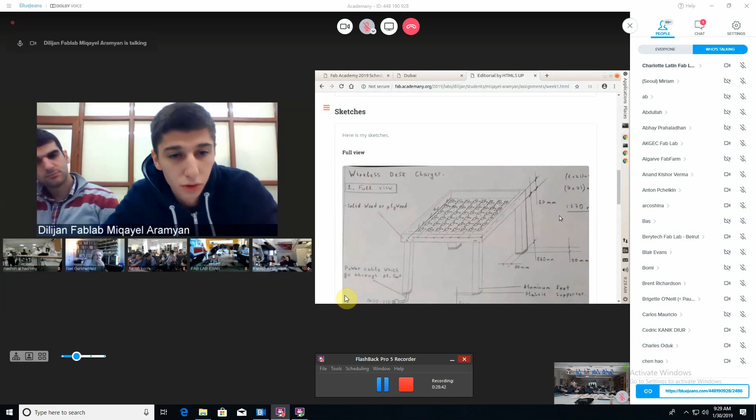Make a desk which is fully wireless charger. Wherever you put your device on the surface of the desk, it will charge, and it can charge several devices at the same time. Also, I'm thinking to make a receiver for computers, to put this receiver under the computer notebooks, and it can charge it wirelessly.

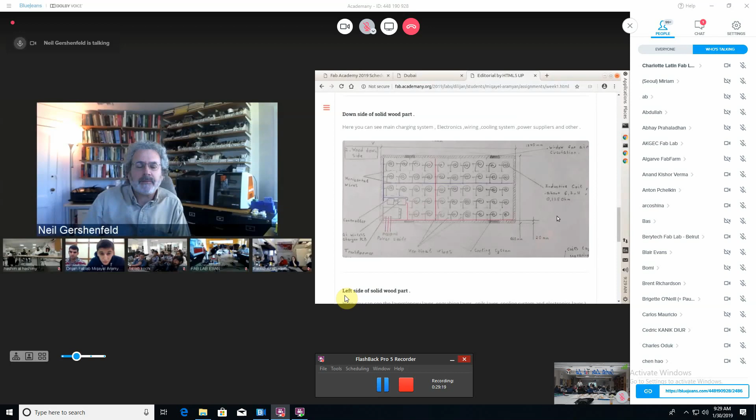The direction is good. For computers, you need to be careful about the amount of power you can transfer. One of my former students is one of the gurus of wireless power - look at Josh Smith. He's done lots of versions of sending power wirelessly.

Let's see. So he has lots of versions of, like, lighting up a light bulb at a distance, and a number of research papers on how to do it. He's transferring lots of power, watts of power.

It's a fairly ambitious thing, and one direction would be to make something along these lines that can do large amounts of power. Now, your project raises a question I can't answer, which is I don't know what the standard is for like a cell phone for wireless power. I've never looked at that. I don't know if anybody listening has - I don't know if it's just a frequency or if there's some encoding or modulation.

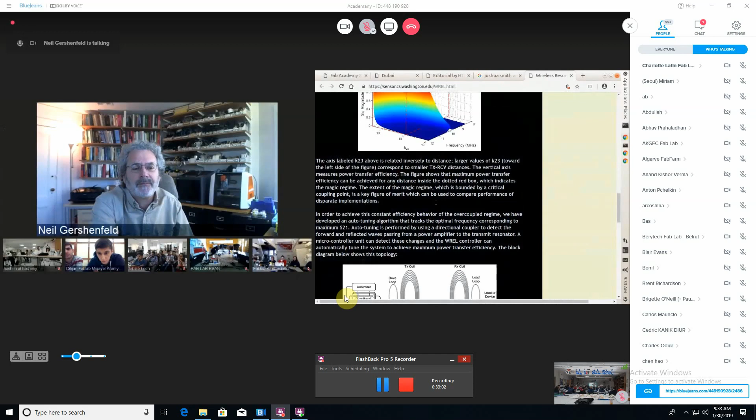It's an interesting question because I've never looked at the standard for phone wireless charging, and it would be interesting to reproduce that. Just for the physics of it, Josh has written a lot of papers about how this works that can cover background for what's going on.

Okay, I will look at it. Okay, thank you. Good, okay.

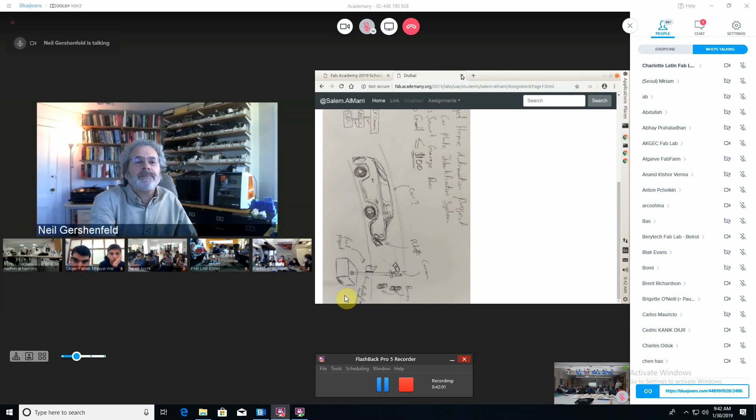Where is La Lab, Elvira? Oh, Suriname. Are you on, Suriname? Yes, we're on. Okay, good. So just to remind everybody else, Suriname is there.

So, my name is Elvira Rajesh, and yes, I'm a student of business economics, and yes...

I'm participating in Fab Academy 2019. I'm a distance education officer in my department—we have students that work far away from where they need to study. So my department, we implemented distance education so students can follow their studies online.

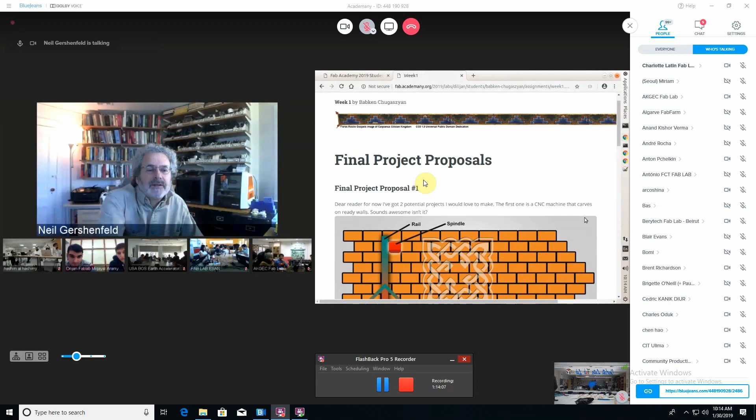Okay, nice. So did you have a final project question? Yeah, my final project is about carving, about building a mobile CNC machine that would carve on ready walls. We have a lot of ready walls, from tuff, a relatively soft rock, and not just ready panels, but walls that are made from bricks.

And I have a second proposal for a final project, about smart classrooms, building a chair that takes attendance notes from each student.

You could do either, which are you more excited about? I'm excited about both, but we talked with Ohad and he thinks the first one is better because it somehow reflects our cultural heritage in Armenia. Stone carving is a very old tradition in Armenia, and we have so-called khachkars, carved rocks, and we have a lot of them all over Armenia.

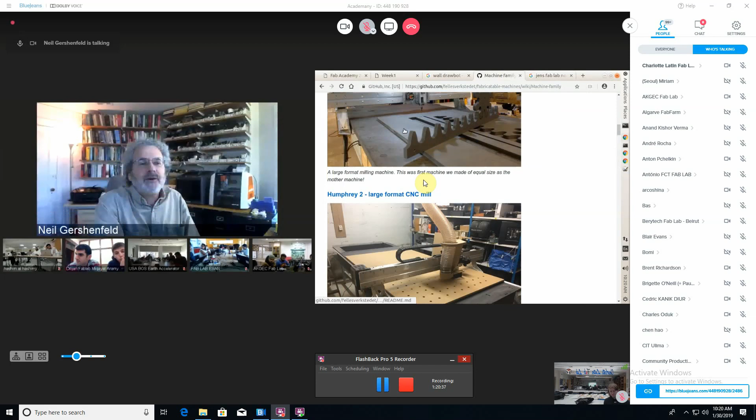And he's making, this is a fun sequence, a shopbot made that machine, which made this machine, which made this machine. And for the motion systems, he makes his own rack and pinions.

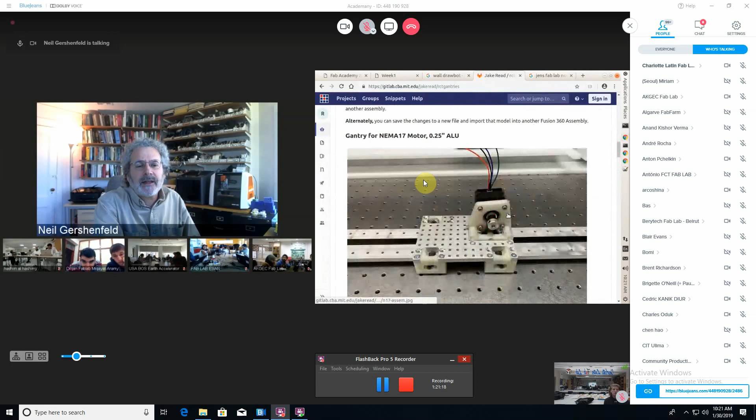I have a student, Jake Read, who has a site, Open Assemblies, where it's a slightly different approach. What Jake does is he uses the bearings from roller skates, and then he uses these bands rather than the rack and pinion. But this is another version of making your own axes for the motion system.

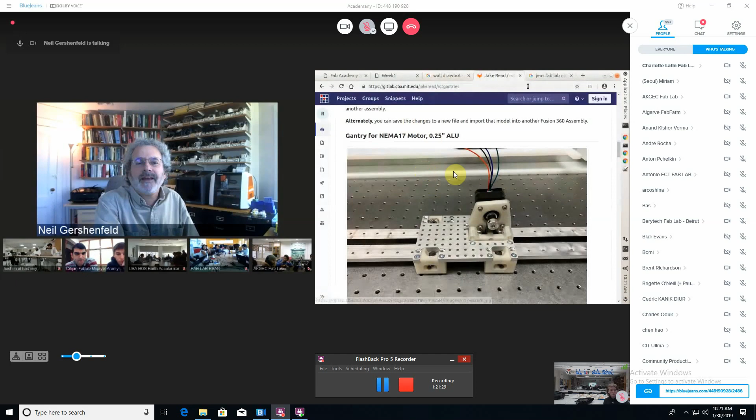I love this. Yeah, thank you very much. And so we'll cover lots of ways to do those when we get up to machine building.

Okay, so I have a question regarding my final project. I got an idea from a previous Fab Academy candidate. It was about a crystal structure digital cube. It's mentioned in my assignment week 1.

In the assignment section. Yeah, I understand, I'm going back to it. Let's see, yes, something's wrong with the website. I can't, when I go to assignment I get contact me, I can't click on assignments. Okay, let me tell you. I want to... okay, oh no, there I got it. Okay, yeah, go ahead, okay.

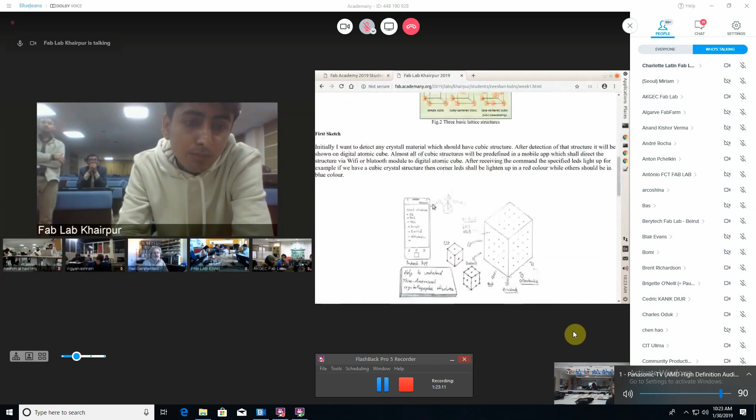I want to make a digital cube which shall print all the cubic crystal structures, the cubic structures found in nanotechnology. I'm really interested in this project, and I want to add some extra features, like image processing to detect some materials and print the structure of that material. And second, I want to detect the voice of any person or image of any person.

Sorry, let me interrupt for a moment. Let me explain to everybody: this open time at the end of the class isn't just for final project reviews. There are hundreds of students, and we'll work through the random generator. The real goal of this open time is not for final project questions, but to go over the work of that week, who had successes, who had failures, lessons from the week. So let me respond to you on this one, but the goal isn't for lots of final project questions, it's to talk through that week's work.

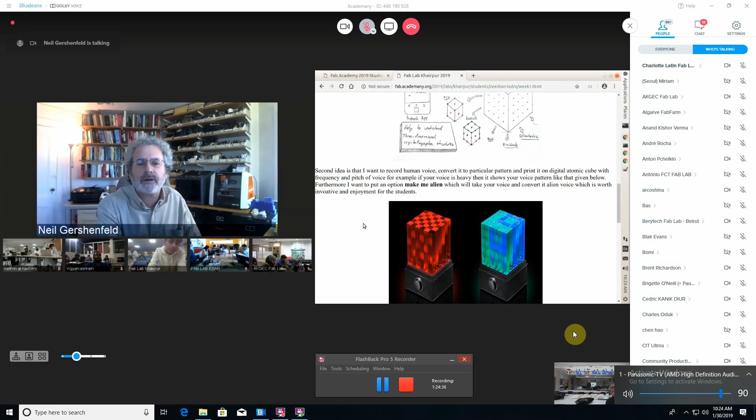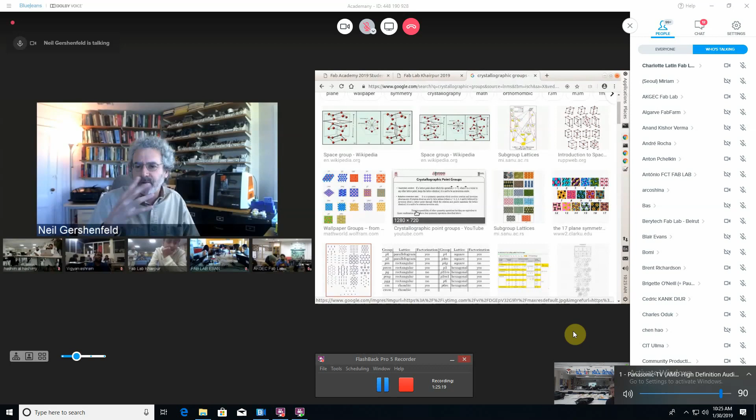This is a good direction. I think something that would be really interesting is crystallographic groups. The heart of crystallography is something that's really important but hard to learn. There's a crystallographic notation, and there's a fixed set of all possible crystallographic groups of local organization of a material. Something that could let you visualize the crystallographic groups physically and tell you what they are, and then tell you what materials have that group, would be really interesting. So a 3D version of the crystallographic group display would be a really nice project, turning this into a 3D display. A number of people have made lattices of LEDs, and that'll be straightforward, but connecting it to these crystallographic groups would be really interesting.

Okay, we're almost out of time. Let me go to, I know Vigyan Ashram wanted to say something, but once again this time isn't just for final project questions, it's to talk about lessons from the week. So Vigyan Ashram, go ahead. Yes, hello, this is Manoj. Okay, can you hear me? Yep, go ahead.

Okay, so I have a bachelor's in mechanical engineering and master's in entrepreneurship. Before Fab Academy, I was working as a business developer. My goal is to find some innovative product and start my own venture. Okay, but again, let's not do the whole random review, we only have a few minutes left. What's your question or comment?

Yeah, I wanted to show my website. It's made from the React framework.

Okay, let me explain to everybody: Vigyan Ashram we call Fab Lab 0. Fab Lab 1 was in Boston, but I visited Vigyan Ashram many years ago before Fab Labs even started, and the idea really grew out of working with Vigyan Ashram.

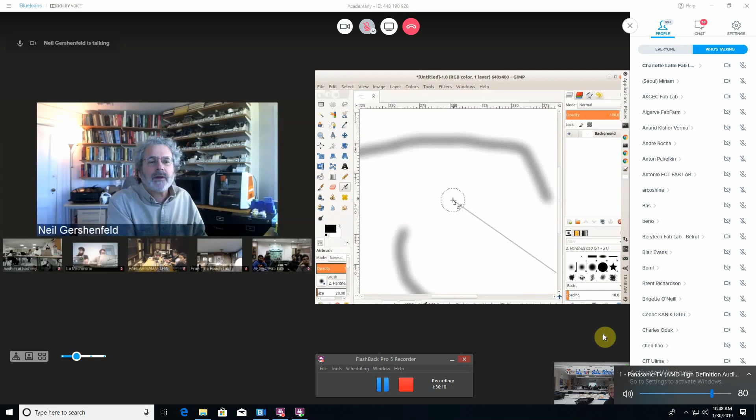GIMP is freely available, cross-platform, a very powerful pixel editing program. So when you work in GIMP, if you draw something, if you zoom in enough, what you'll see is you're representing things as individual dots, as individual pixels.

GIMP lets you paint, it lets you edit images, and it is a design tool because we're going to cover how to go from an image to all the fabrication tools. So once you have an image, you could laser cut the boundary, you could cut the intensity of the laser, you could machine the image. This is good for things where you need flowing expressive designs and single pixel images.

GIMP is powerful, freely available, cross-platform. I use it all the time. The commercial most popular tool is Adobe Photoshop, which is less extensible in some ways than GIMP. In many ways it's more powerful than GIMP, but it's a paid tool you buy or subscribe to. It's popular with people who do this for a living. I do a great deal in GIMP.

A neat tool to know is MyPaint. In class, when I've been making these sketches, I'm using MyPaint. What that lets you do is first pick the material you're on - is it fabric, is it paper - and then pick the kind of brush you're using. It has many types of brushes, and so it emulates drawing on a material. It's a really nice drawing painting tool, and that's what I use for the illustrations in class.

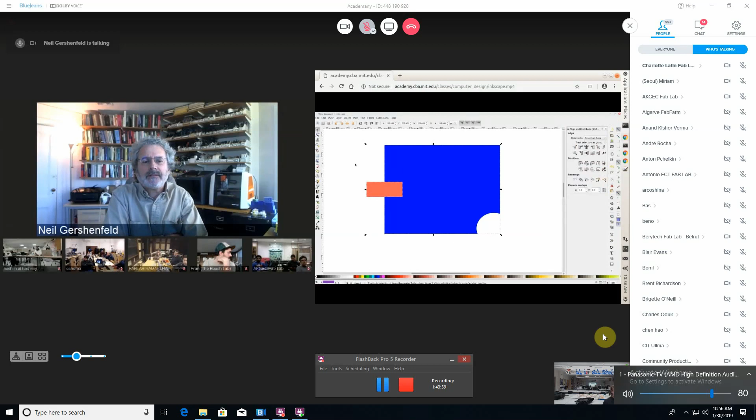Now instead of copying this object, I'm going to clone it. A clone creates a linked copy, so with the clone I can align that. And now if I take that object and change the original one, the clone changes.

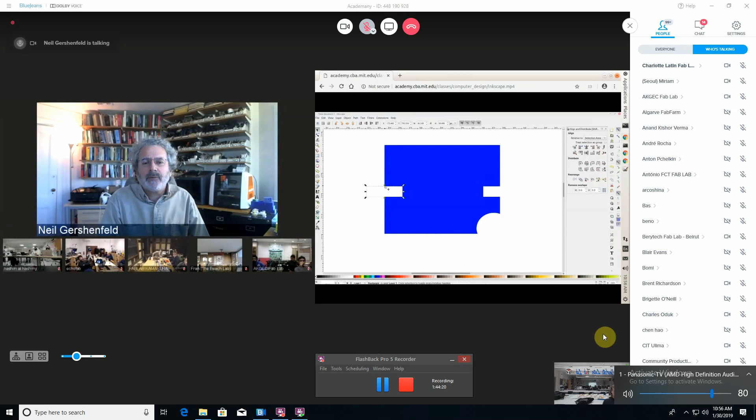That was a really simple way of doing it - I'm going to show you much better ways. Let's see, somebody is asking on the chat to do something on my PC screen. I'm not sure what you're asking for.

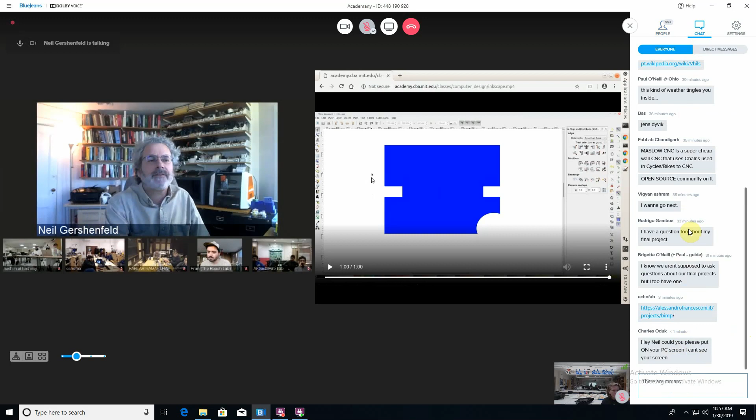That's a simple way to make a cutout, and when you change one cutout, the others change. It's not really full-blown CAD, just a simple example. Inkscape is a freely available, nice tool for vector drawing, where you don't want pixels but you want shapes like circles, squares, and curves.

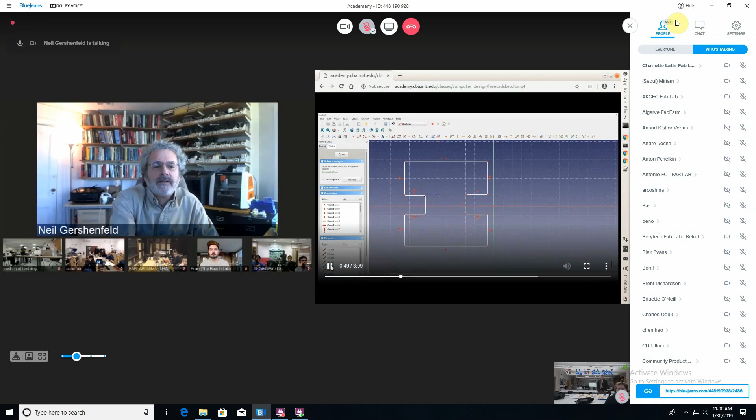So what I'm doing right now is picking 3 segments, and then I'm going to pick a constraint, and say those should be the same length. Now if I move a point, you see all 3 move at the same time because they're constrained.

Now I'll pick those 2, and make them the same length. So now those move together. And then I'll make those the same length too. So now if I move the point, it stays centered and they all move together.

Then I can dimension - I'm going to assign a dimension to that. And then I'll assign a dimension to that.

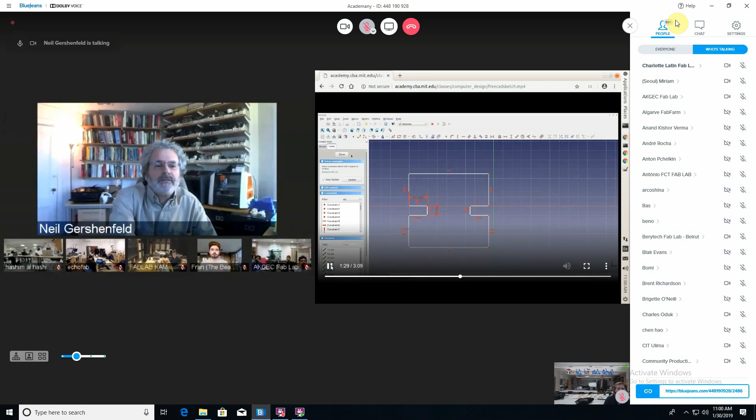So now if I go in and edit - well, before I do that, now I have my sketch. Now I'm going to promote the sketch from 2D into 3D. I'll go into the Part workbench and extrude my 2D sketch into 3D, turning it into an object. So there's my object.

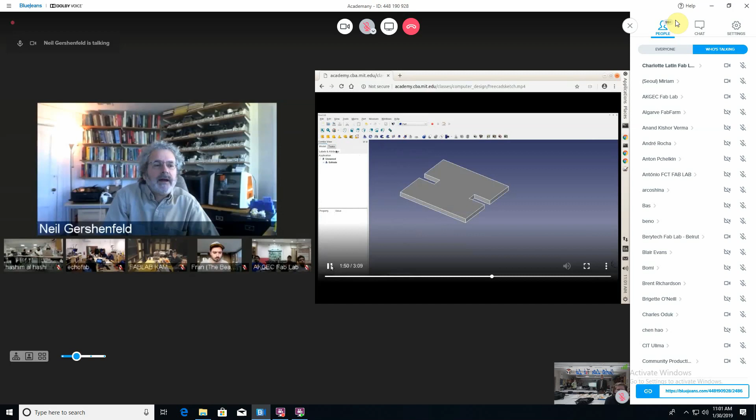Now I'll show you a more advanced thing you can do with sketching. Here's a 3D object I'm starting with. What I can do is take a part of that object and put a sketch right on that object.

So I'm going to put a circle here, and then pull in part of the edge - I'm going to say I want to use that edge in my sketch. And then I'm going to say I want to control the distance from the edge.

And here I'll just do a little more work - I'll make an object, I'll trim it, and then I can take the sketch I did in 2D on a 3D object and turn that back into 3D.

And then I'm going to cut this out of the object - I'll take those two objects, do a 3D Boolean, and take that out of it. So I drew in 2D on the object, and I drilled into it.

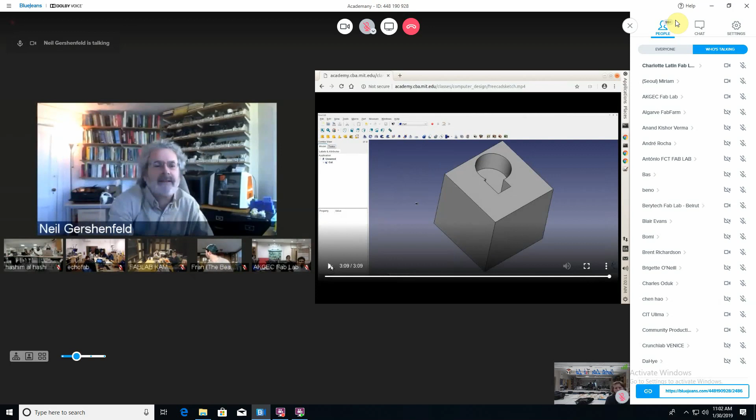This core capability of constraint solving is much more powerful for 2D drawing. You can have a single parameter for the slot size and use that everywhere in your drawing. FreeCAD is a nice, freely available cross-platform tool with a very powerful 2D constraint solver.

So that's 2D. 3D is a much bigger universe. This is a link to a thesis from a former student, now at Formlabs, on CAD geometry, and his thesis has good background on how to represent geometry. There's a number of terms to learn to draw in 3D.

Constructive solid geometry, or CSG, is the ability to do logic on shapes - you can add two shapes, subtract a shape, or intersect a shape. Constraint drawing is what I showed, where you don't just make a drawing, but express relationships in the drawing, things like tangency or distance.

Hierarchical drawing is - if you go back to the cutout slot example, you might design a slot, and we're going to cover joints that are actually very complex, then you reuse the joint many times over. So a hierarchical design is one where you design a thing, then use that thing in the design, then use those in other designs. And if you change something, it changes many different instances of it.

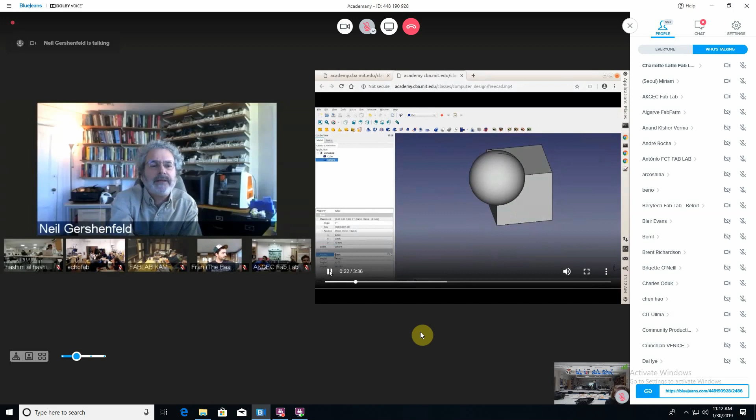So now what I'm going to do is position it and do a 3D Boolean, so I just subtracted the sphere from the cube.

But now, crucially, unlike a simpler tool, the cube and sphere are still there. If you look, they're grayed out because I've done the Boolean, but they still exist as objects. So now I'm taking the sphere that looks like it's gone, but it's still there, and I'm going to edit it. When I edit the sphere, I'll change the cutout.

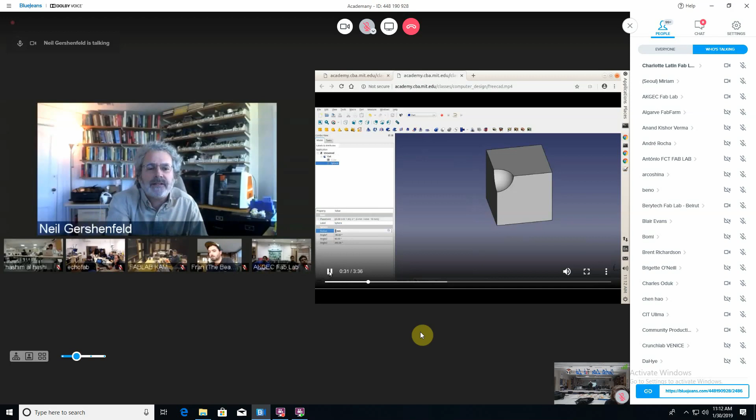So now I'm going to start doing a more complex operation. Just like the clone in Inkscape, I'm going to take the sphere and make a clone of it, which is a linked copy. I'm going to position that, and then I'm going to do a Boolean again.

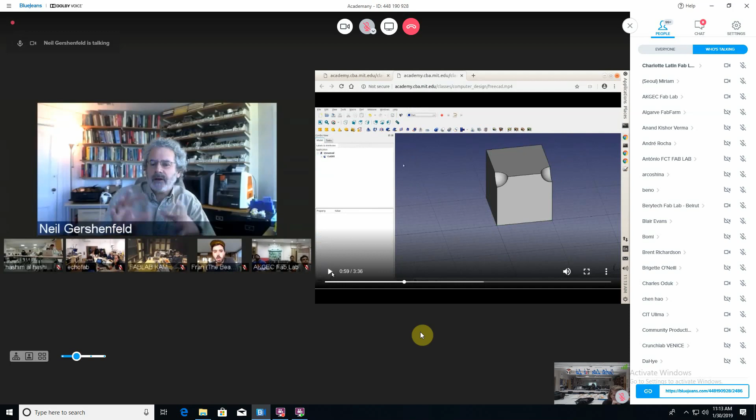So now I have two cutouts: my original sphere and then the clone. And then, as you would expect, I can go to the original sphere and change it, and both cutouts will change because it propagates through the clone.

Now, this is the heart of parametric design. You might have parameters like the thickness of your cardboard or the type of material you're using. So I'm going to add a spreadsheet, and in the spreadsheet I'll say radius, and I'm going to add a field.

And so I've got a number there, which can be a formula. Then I'm going to give that field a name, R. So now I'm going to go back to my drawing, take the size of that sphere, and link it to the spreadsheet.

So what I just did is say the radius of the sphere comes from one of the variables in the spreadsheet. Now if I go to the spreadsheet and change the formula, then go back and look at the sphere, the spreadsheet controls the dimensions of the thing in my design. That's a very simple formula, but next week I'll show you a more complex use of a spreadsheet with a formula.

Now, a few other things. Here I'm going to control how it's rendered. So I just made it 50% transparent so you can see into the object, which is really handy when you're designing.

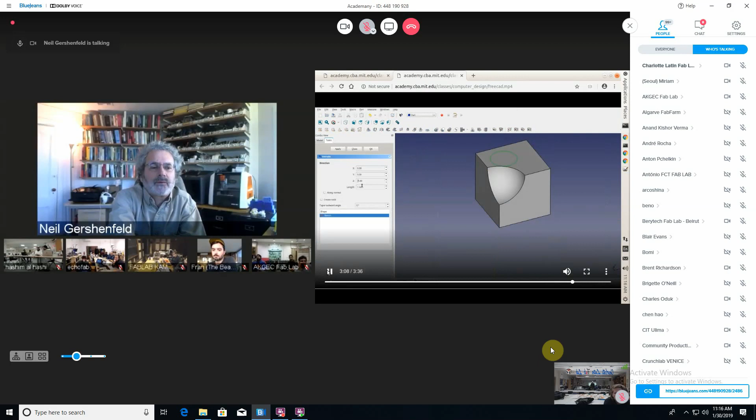So I want those to touch. I did 3D design to make a cutout, now I'm making a 2D drawing, but connecting the 2D drawing to the 3D cutout. Now I'm going to extrude that sketch and cut it out, make it a solid, and then do a Boolean on that.

So now I'm going to do something non-trivial. I'm going to go to the original sphere and change its size, and watch what happens. So the sphere got bigger, so that circle got smaller.

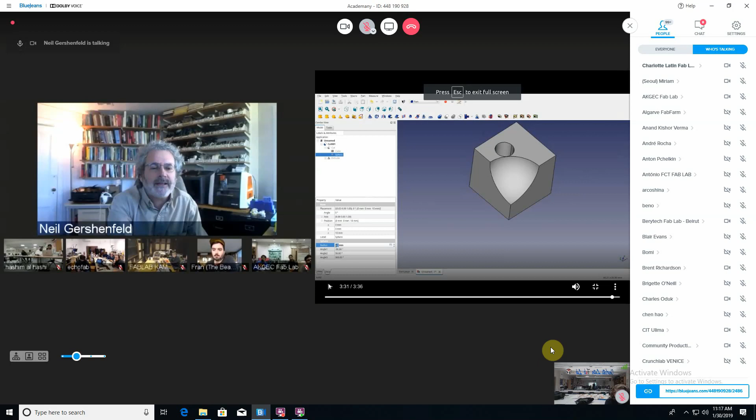And so when I did that, the sphere data had to go back through the Boolean. Then the Boolean had to go to the constraint solver for the tangency of the circle. And then that circle had to go back through a Boolean to subtract it again, and all of that is linked. So just in that last little bit, a whole bunch of different steps have to happen in the parts of your design. That's what a more powerful CAD tool does.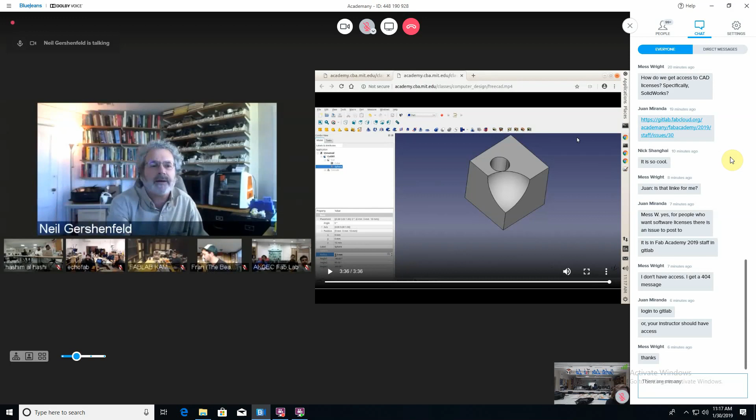In the coming weeks, I'll show you a number of different examples of more complex spreadsheets and parametric designs and their use. So once again, FreeCAD has evolved quite a bit.

Let's see, I don't have it on. Since this is Linux, I can just ask for FreeCAD, so I'll get that installing. It's well supported on every platform, and it's a really good design tool that just keeps getting better and better.

I'll show you when it's done opening. So then from Autodesk, there was AutoCAD, which I don't recommend for anything new—it's largely historical. There was Inventor, and the focus at Autodesk is Fusion. Until recently, a former student from my program at MIT ran that, Eric Wilhelm.

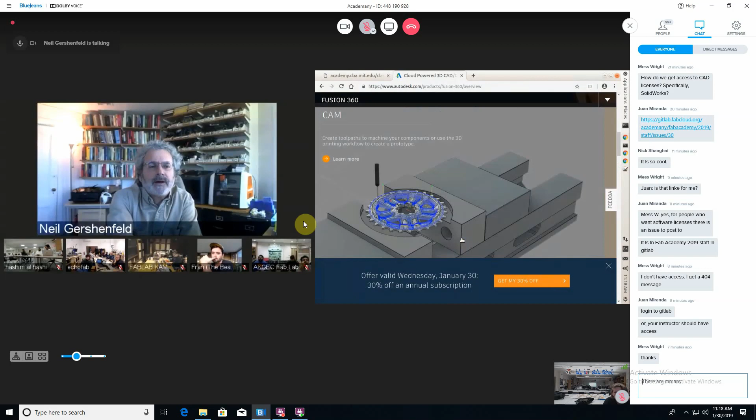Fusion is beautifully integrated—its real strength is that CAD, CAM, and modeling are all nicely integrated in the tool. It's not free or freely available, but Autodesk has a very aggressive education program, so it's freely available for educational, non-commercial use. They've been very generous in making it available. You do need an identity in their cloud to use it, and you need a connection to their cloud, so you can't use it on a deserted island. But it's very popular because it's so beautifully integrated—CAD, CAM, all the steps, modeling are all nicely integrated in it.

So here, thanks to the wonder of apt-get, I just installed FreeCAD. I was just going to show you, so let's see... okay, here it goes. There we go.

It's based around workbenches, so there are all these different workbenches and they keep adding ones. This is one for structural modeling, for example. This is one for dealing with point clouds. This is one for dealing with rendering. And everything is extensible in the Python language, so you can write programs for it easily, and then people contribute add-ons to it.

There's an add-on manager. Let's see, I thought it was in tools... I forget where the add-on manager is, but there are add-ons you can add that extend it, and there's a number of community add-ons that have been added to extend it.

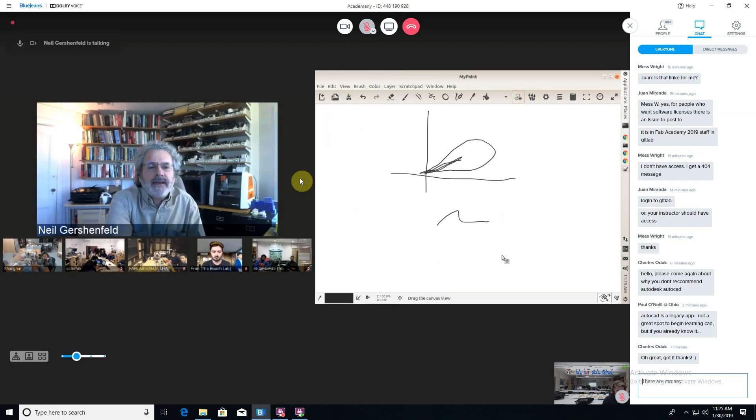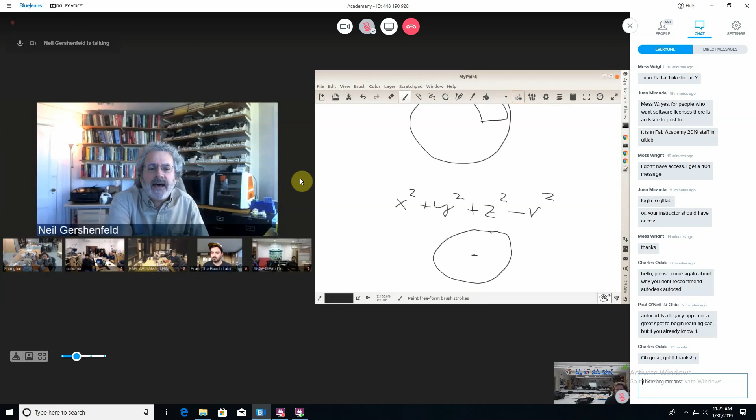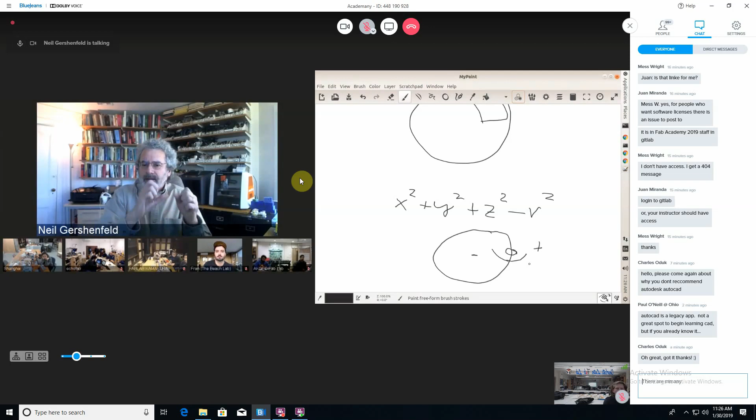If you have a sphere, these other tools model it as patches of the surface. In a functional tool, you have a formula: x squared plus y squared plus z squared minus r squared. That formula is a function—it's negative inside the sphere, positive outside the sphere, it vanishes on the boundary, and the magnitude grows around the boundary. So it represents an object as a function, not as patches of the surface. That's much more powerful mathematically, but harder to use.

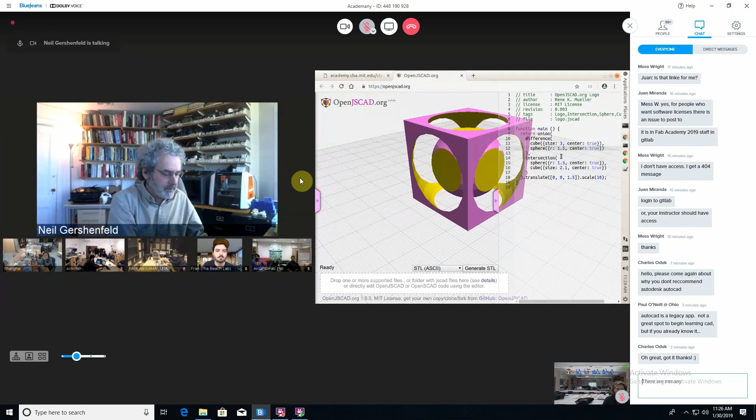But there's been a lot of progress in the speed of computers and the speed of the solvers. OpenJSCAD is a version of this in the browser. Here's a sphere subtracted from a cube—let me make the sphere smaller. So small you can't see it. Let me make it bigger.

Each time I do this, I'm describing how the parts get assembled in a hardware description language. It's producing a function, and then solving that function to make the shape. It's a very different kind of modeling where you describe the relationships of objects through functions.

Matt Keeter, who wrote the thesis I linked, originally wrote a solver for these in what was called the Fab modules. That became a program called Kokopelli, which became a program called Antimony. The current version of that lineage is a library called libfive. This is a functional representation solver, very different from the other things I've shown you.

So what I'm going to do now is use this tool called Antimony. I'm going to start adding a shape—this is like what I did before. There's a cube, there's its data, and then here's a sphere. So this looks so far like what I did before.

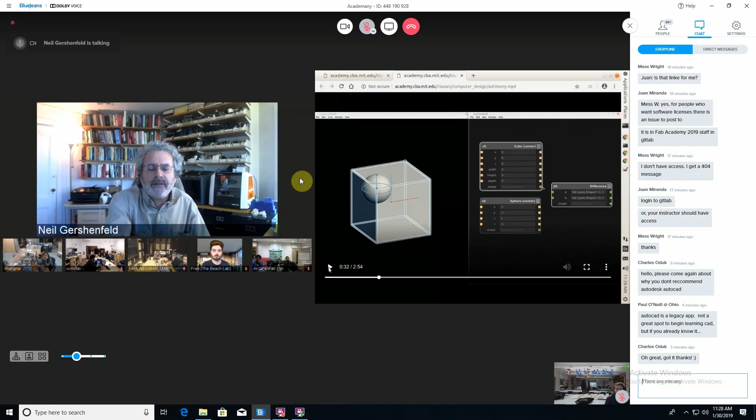One difference now is this is a node editor. Rather than a history, I'm making a graph of the construction. Here I'm doing the Boolean operation, but making a graph of how the parts relate. Now I can edit the sphere and subtract it—each time I move it, you see it blinks a little bit. It's solving the function, and in a little while I'll show you why that's so different.

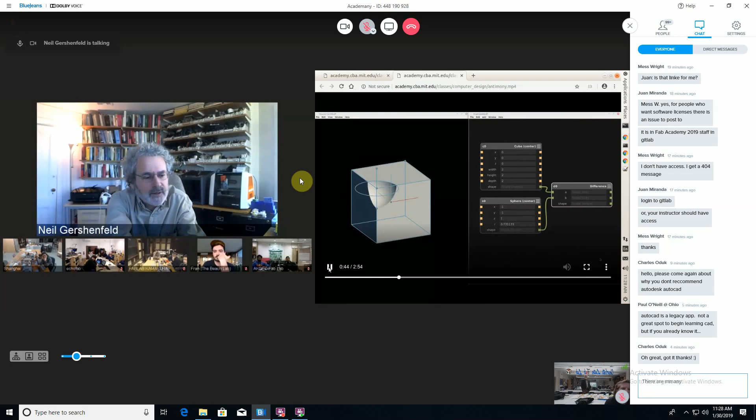Now, rather than clicking clone, I'm going to recreate the object and then do another Boolean. So I'm not clicking and making a history, I'm making a graph of how the object is constructed. Now I can go back to the original one and it propagates through the copy.

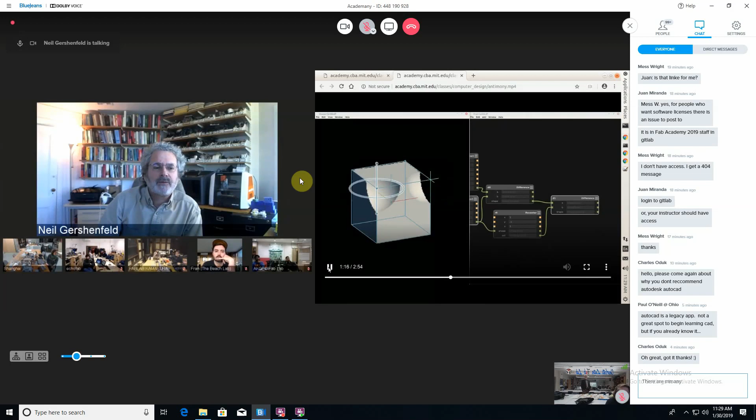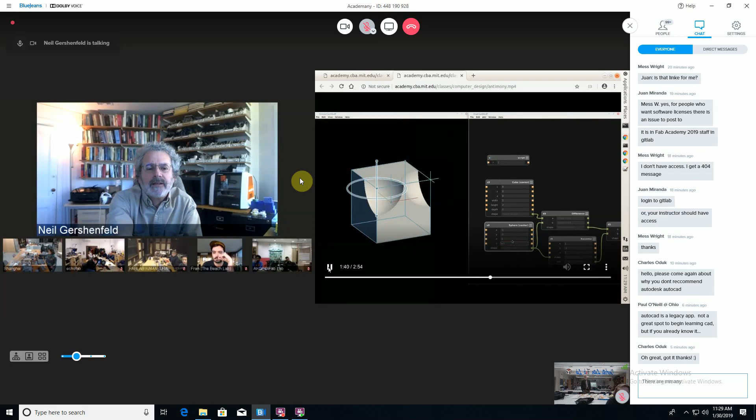But before that, I'll do one other thing: I'm going to add a node—this is like the spreadsheet in FreeCAD. In this node, I'll make a variable, and then use that variable in my design. So instead of that being a number, I'll refer to that object, and I can come to that node and edit the design.

Now what I'm going to do is, because an object is a function, I can twist it, shape it, and bend it. You can manipulate the object because it's a function. So watch this—I'm going to add a transformation.

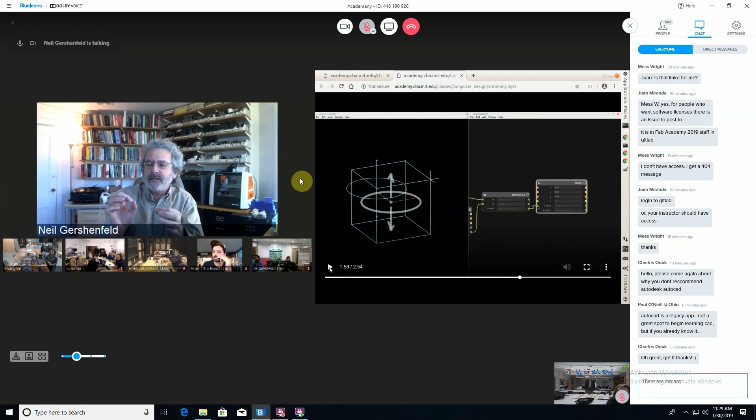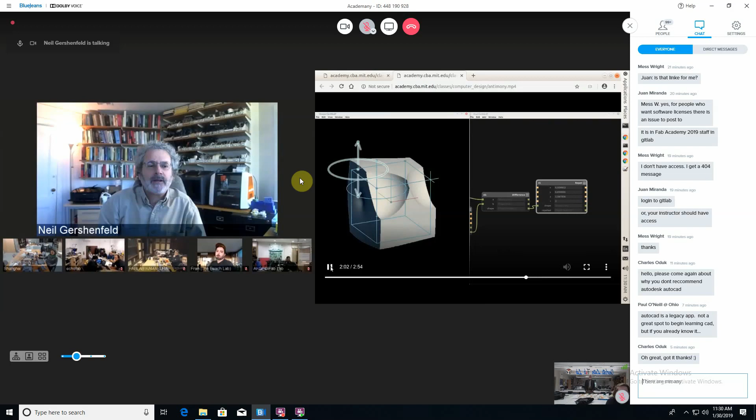This is a repelling node—a node that the object doesn't like. Now, as I move this node around, you'll see the whole object is warping. I'll do that again: as I move this repelling node around, I'm morphing the whole function. The object morphs and deforms around it. It's still parametric, it's still hierarchical, but I'm deforming everything because the object is a function that I can manipulate.

So now I'll do something even crazier. I'm going to add a torus. And because an object is a function, there's a notion of an object in between other objects.

So what I'm going to do now is morph. If I go one side, I have my crazy object. On the other side, it's the torus. And I can continuously go between the torus and the bendy, morphy, twisty object. Because an object's a function, there's a notion of an object between other objects.

So functional representation modeling is a really powerful abstraction for manipulating objects. You can do that in Antimony, and FreeCAD has an OpenSCAD workbench. As part of modeling, that's great when you want to be able to smush and manipulate an object.

Mods is something I wrote to do workflows. And mods also has a basic FREP solver. So if I produce this and I look here—

Here is an object, but it's being controlled by this graph. Here, I'm going to add a server module, object view. And so if I take this object, this shows you the function that when you solve it gives you this object.

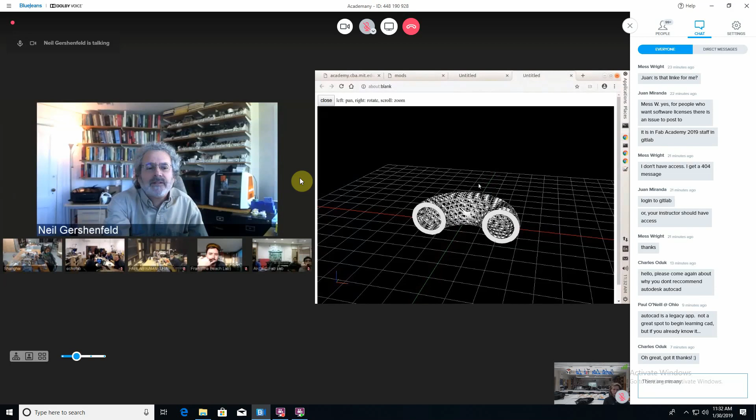And so all this is actually using—this module uses the GPU, the graphics processor, to solve an FREP. So if I make this shell thinner, or if I make it thicker, it controls the thickness of the object.

I can change the view. This is X-raying to see inside the object. This is lighting the object. I can change it from an open to a closed lattice. And all of this is being done using the GPU to solve these distance fields.

So it's still a work in progress, but there's the beginnings of an FREP solver right in mods to do CAD with it, right in the browser. Here there's nothing to install, it's all on the client.

And then finally, GrabCAD is a site for sharing designs, and it has a really handy viewer. You can paste their viewer into your site to make an interactive viewer of your 3D designs.

Okay, so that's a tour through types of 3D CAD programs. When you're done, you won't likely pick just one of these. You'll use a mix of these, because if you take all of these attributes, they vary in their strengths. But the main thing you should do this week is try as many of these as possible.

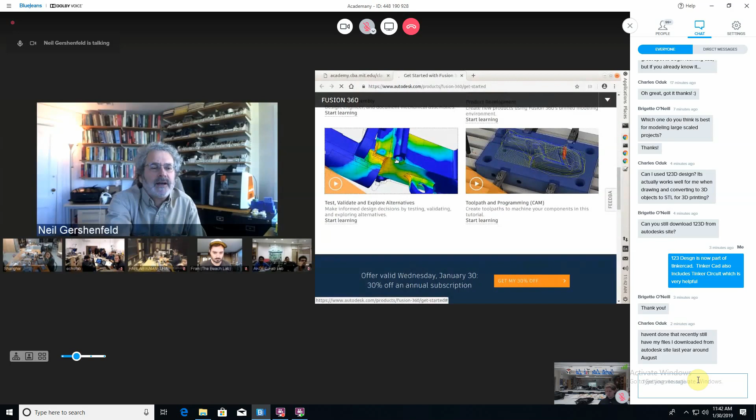And then if you're using Fusion, one of its strengths is it has a really good modeling environment. It doesn't do all kinds of physics, but for core things you want to do, like the loads on a structure, Fusion has the modeling built in very nicely.

What's hard about these modeling environments is getting your design into it and then getting the answers out of it. In Fusion, it's nicely integrated. And again, simulation in SolidWorks. ANSYS and Nastran are high-end ones.

And then there are these two interesting ones. Open Dynamics Engine is a development kit for doing physics, and it's used in a lot of other projects as a modeling environment. So if you have a game engine and you want to model the physics in the game engine, this is a physics modeling tool, and once again it's used in many other projects.

Then Modelica is an EU project along the same lines that has all kinds of modeling tools, and depending on the version, is freely available, open source, and can do many different types of physics, all shared through that. This has been evolving as a really interesting, powerful modeling tool. So those are both options for modeling your project.

Then the last thing I'll cover is audio and video. As you work, you're going to be making videos documenting your work weekly, and later in the semester we'll want you to make nice videos on your final projects. So you'll need to be comfortable with audio and video production.